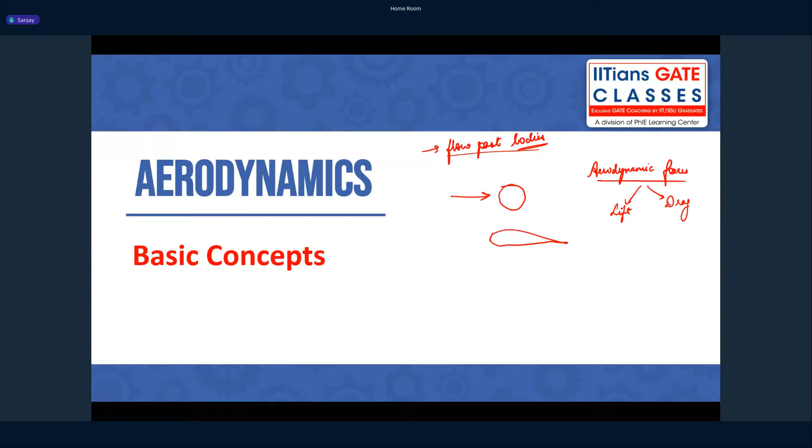We are going to get into multiple theories which will help you to mathematically understand how these forces are produced. We are going to link it to the application, and so this course is mostly going to be theoretical. Here and there we will see some applications of that. So that is, in very brief, about aerodynamics. Okay, so now let's get started.

To start with a very simple question: how is lift generated in an aircraft? So what do you see here in this image? This is an aircraft wing, right? It's a wing of a commercial aircraft. This wing is what helps you to generate lift, and that is the force which helps your aircraft to lift off in the air, right? So how do you think lift is generated by this wing?

Anyone? Please feel free to talk. The more the interaction, the more we are going to learn. So how is the lift generated?

Difference in pressure. When the flow moves around the body, the aerodynamic forces acting along the body are different. In this case, the upper part experiences less pressure, the lower part experiences more pressure because of the body shape, which basically affects the flow, and thus the lift is produced.

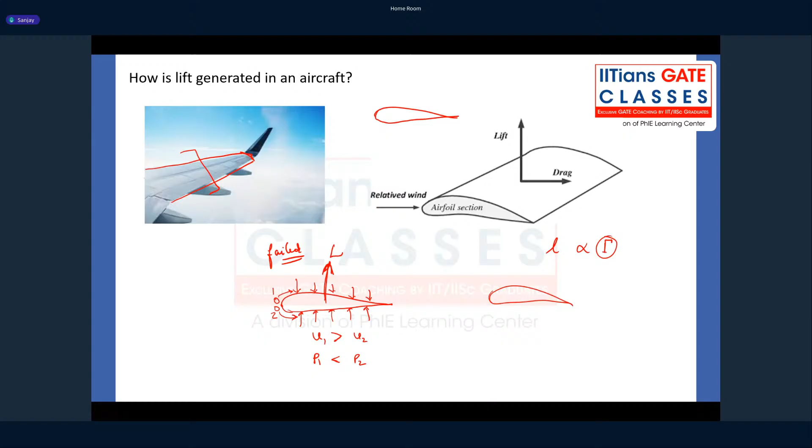This was proved. Does someone know what this theorem is known as, which relates lift and circulation? If anyone has already done aerodynamics. Okay, so this is known as the Kutta-Joukowski theorem. We will study this in our course later. We will actually derive this theorem, which says lift is directly proportional to the circulation.

The circulation itself is produced due to the airflow, due to the velocity distribution on the surface of the aerofoil, which in turn makes the pressure distribution. So ultimately we are saying the same thing, that it's due to the pressure distribution, but the way we explain is different. If you read about the early development of aerodynamics, people were actually struggling to explain lift generation. Even today, none of the theories can give a very satisfying and convincing explanation. There is some or the other flaw. So who knows? Maybe whatever we are learning today might become obsolete after a few years.

All right, so keeping aside those things, for us now we understand that there is this shape called an aerofoil. It is an aerodynamically designed, streamlined shape which produces aerodynamic forces, lift and drag. Is that clear to everyone till here? Are you all following?

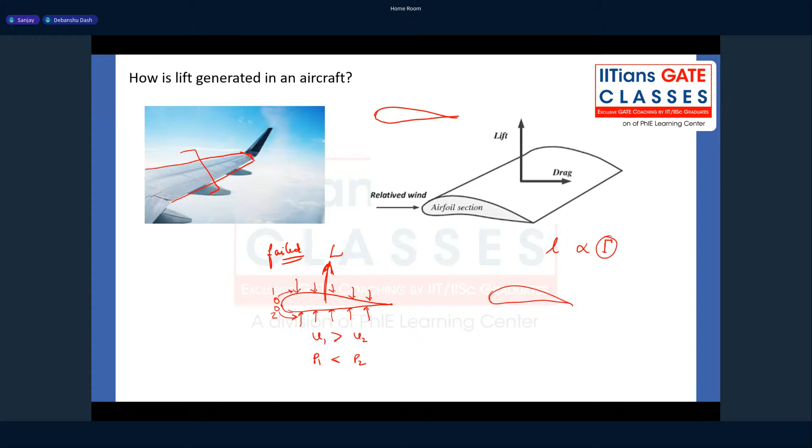So the image that I had shown you, what kind of wing was this? What kind of wing do you mostly observe in a passenger aircraft that you normally fly? It's a swept back wing, sir. It's a swept wing, okay. And is it a swept rectangular wing? Yes, sir. It is a tapered wing, right? You can see it tapers. Tapers meaning the cross section changes along the span. So the aerofoil sections keep changing. It is not the same at the root and the tip. So it's a tapered wing.

So generally, we see tapered wings in conventional aircraft. And there's a reason why we use tapered wings and not rectangular wings. All these types of wing have their own significance and relevance in the aircraft. So how do you choose a wing? When you do an aircraft design, there's a critical part known as wing design. How you choose a wing completely depends on the mission the aircraft is involved in.

If it is a fighter aircraft, the type of wing you would choose is different. If it is a conventional passenger aircraft, it is different. If it is a stealth aircraft, the wing chosen is different, because you have to minimize your radar signature to have stealth capability. The mission is very important, and if it is a multi-role aircraft, we design it for the worst case scenario. So all these types of wings have their own significance. For example, can someone tell me any aircraft that uses delta wings? Have you seen triangular shaped wings? Any aircraft?

Yes, Ali. Fighter jet. Fighter jets, very good. Tejas LCA, yes. Tejas uses delta wings. What kind of wing does B2 bomber use? Have you seen B2 bomber? Yes, this kind of delta wings. Yes, that's also kind of a delta wing.

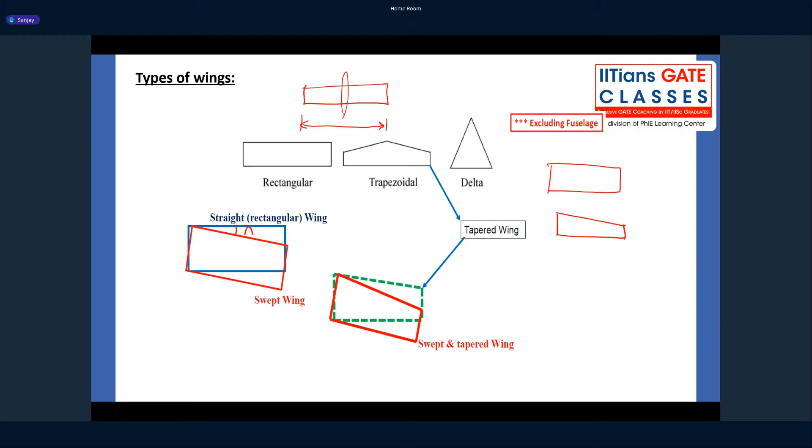Yes, Eurofighter, Rafale, so all these fighter aircrafts, they use peculiar type of wings. Okay, so these are in general the types of wings. So now we'll just quickly see some nomenclature about the wings, some terminology which is used to understand the wings. Okay, so you can see here this is kind of a tapered wing. Let's say if your aircraft is something like this, is your aircraft body.

So the part of the wing which is attached to the aircraft, or which is buried inside the aircraft body, is known as root. Okay, this is known as root, and the free end of the wing is known as tip. Okay, this is known as wing tip. This is known as wing root.

Okay, now as this is a tapered wing, you can see the size of the aerofoil used at the root is different from the size of the aerofoil used at the tip, right? So basically, when I say the size, it's the length of the aerofoil. We call it as chord length. So the chord length is varying along the span. So the length of the chord at the root is known as root chord. We denote it by CR. At the tip, we denote it by CT, tip chord. And at any other location along the span, it is function of the span basically.

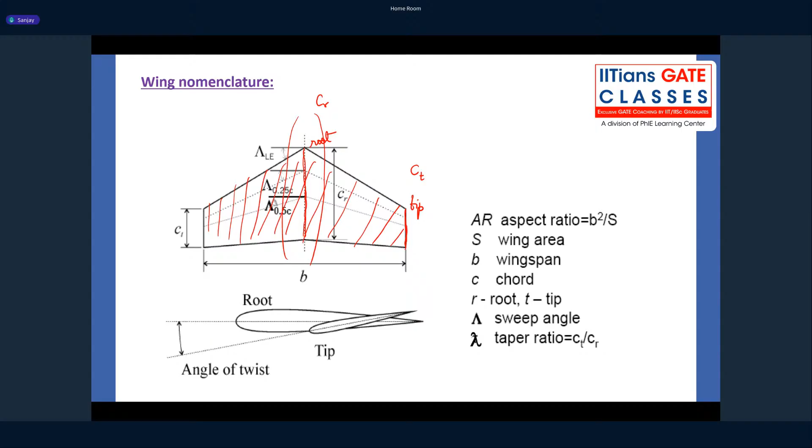All right. So this wing you can see has certain surface area. So the surface area of the wing, which we call the projected area, or planform area, we denote that by capital S. What is that? It is a planform area. Just one second. So the planform area is the projected area of the wing. So what do you mean by projected area? If I project the wings on a plane or a paper, the area that I get is the projected area. So the area of that shape is the planform area.

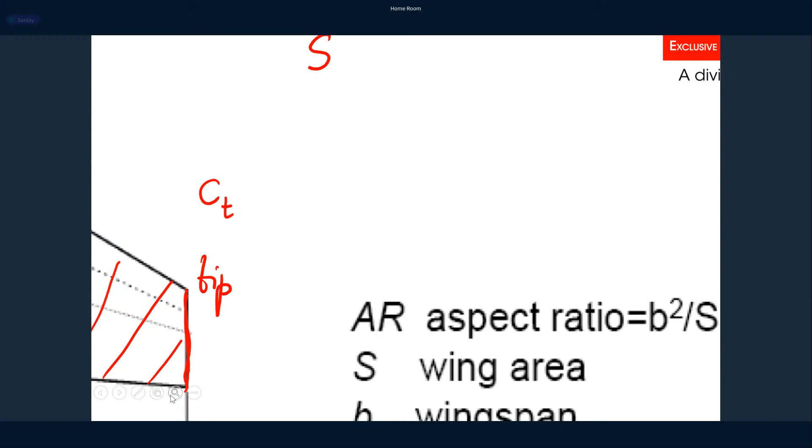Is the planform area which we denote S. Okay, capital S. So generally, planform area is the area of the complete wing. It is not just one half or the other half of the wing. It's for the complete wing. Now in some kind of aircrafts, it depends on the manufacturer. If it is a Boeing wing, in some aircraft, you see that the wing is usually buried inside the aircraft body. In some aircrafts, the wing is not buried; it is just attached. There's a wing fuselage attachment, and the wing starts from the fuselage and it goes to the tip. So in any case, the complete area of the wing is taken as the planform area.

Okay, so we call S as the planform area, and then there's a span. The length of the wing, right from the left end to the right end, is known as wingspan. We denote it by small b, which is the wingspan. So the semi-span becomes b by 2. Okay, C is the chord. Chord is the length of the aerofoil from the leading edge to the trailing edge of the aerofoil. I explained you the root chord and the tip chord.

Now the ratio between the tip chord and the root chord, we call it as taper ratio. So this taper ratio tells you how is the wing tapered, or what is the extent to which you have tapered the wing. So what do you expect, the taper ratio is going to be greater than 1 or less than 1?

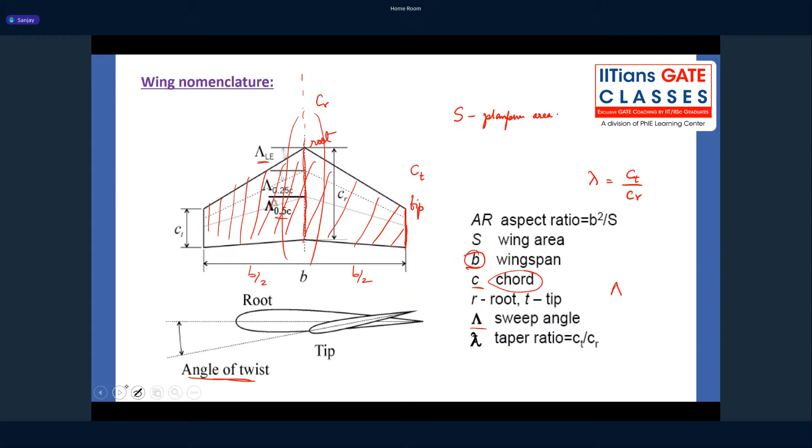So again, there's going to be one major problem in the course, the convention. So I'm going to follow John D. Anderson. Whatever conventions Anderson has used, it's a very standard book, we call it a Bible for aerodynamics, we will be using that. We will not confuse. If you refer to multiple books, the conventions might vary. So we'll stick to one particular convention. All right, I'll just proceed.

Now let's see an aerofoil. So an aerofoil is the cross section of the wing. As I told you, if you cut the wing and you look at it from the side view, you see a cross section which is of this shape. So you can see this aerofoil is a streamlined shape, right?

So the foremost point of the aerofoil is known as the leading edge, or we call it the nose of the aerofoil. It is a blunt nose. It has a blunt leading edge. It is not very sharp. It is not that it is a corner. We cannot make it a corner. The reason you will understand later.

It is so, we make it blunt for some aerodynamic advantages. Okay, so you see that the leading edge is blunt. Rather, if you go very close to the leading edge of the aerofoil, you will observe that this is kind of a circle. You will get an arc, which could be an arc of the circle. So the radius of the circle is known as leading edge radius. Okay, it's known as leading edge radius.

And then you take a tangent from the circle and then you extend, you get the aerofoil. Okay, so there's an upper surface, there's a lower surface, and there's a trailing edge. Trailing edge is the aftmost point of the airfoil. Okay, and there's a line which extends from the leading edge to the trailing edge, known as chord line. We call it chord line, which goes from leading edge to trailing edge.

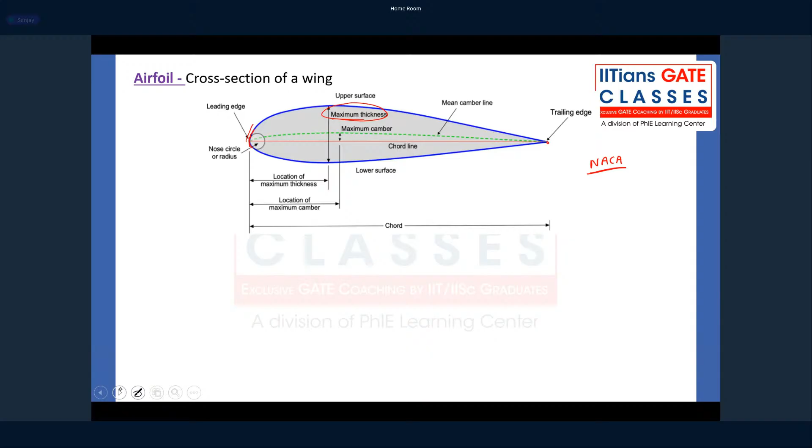So I've written the same thing over here and not repeat. So you can see that you have a symmetric aerofoil. A symmetric aerofoil is where the upper surface and the lower surface have very similar curvature. The curvature is not different. Or you can say that if you look at the upper surface and the lower surface, the coordinates are at equal distance from the chord line. So it is a symmetric curvature with respect to the chord line, so we call it a symmetric aerofoil.

Symmetric aerofoil is the simplest type of aerofoil, which has zero camber, so it is easier to analyze mathematically. But do we generally use symmetric aerofoil in a wing? No, right? We don't use it because it does not generate any lift at zero angle of attack. So we always use cambered aerofoils to get the advantage of lift.

When we say cambered aerofoil, you could have positive camber and negative camber. A positively cambered aerofoil has the camber line above the chord line. This camber line is nothing but the average of the upper surface coordinate and the lower surface coordinate. If you take the average, you get the mean camber line. If the camber line lies above the chord line, we call it a positively cambered aerofoil, otherwise it's a negatively cambered aerofoil.

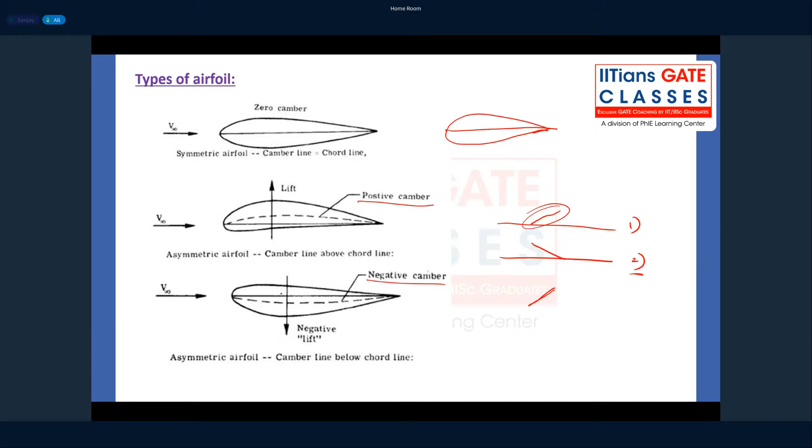So you cannot use a negatively cambered aerofoil, because if you use that, will you be able to cruise? During cruise, your angle of attack is a positive angle of attack, right? You will not be able to cruise. So now let's define angle of attack. Angle of attack is the angle between the relative wind and the chord of the aerofoil. So chord line and the relative wind, that is the angle of attack.

A lot of people have a misconception about angle of attack. They think it is the angle at which the aircraft is oriented. No. There are different angles: one is a pitch angle, one is a flight path angle, and there is angle of attack. All three have different meanings. Angle of attack is defined as the angle between the wind or the free stream velocity and the chord line. So always be careful about the definition. So you can have two cases.

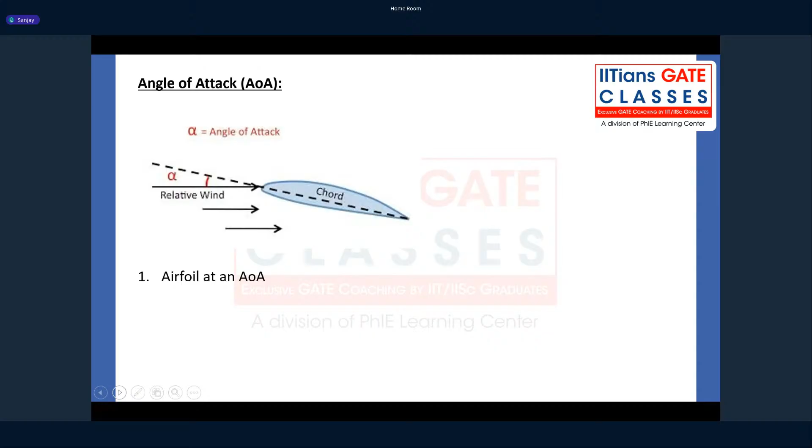One case is that your free stream velocity is approaching in the horizontal direction and your aerofoil is inclined. So there is an angle of attack generated by the aerofoil. This is your alpha. We call this configuration aerofoil at an angle of attack. And there could be a second possibility where the free stream is at an angle of attack, which means your aerofoil is straight, but the air hitting the aerofoil is coming at an angle of attack.

It could be something like this. This is the chord line, and this is the free stream velocity. So again, there's an angle which is the same angle alpha. So there can be two possibilities. Can someone tell me, do both of these possibilities mean the same to the aerofoil? Okay, Yaneshwar, yes, this was asked in the paper. Same. Both are same, right? Yes.

You would have heard that whether a body moves in the fluid or the body is kept stationary and the fluid moves over it, the effect is the same, because ultimately the movement of fluid particles generates these forces. So whether you keep your aerofoil at an angle of attack or keep it straight and let the free stream pass at an angle of attack, the performance of the aerofoil remains the same. That does not change. Is that clear?

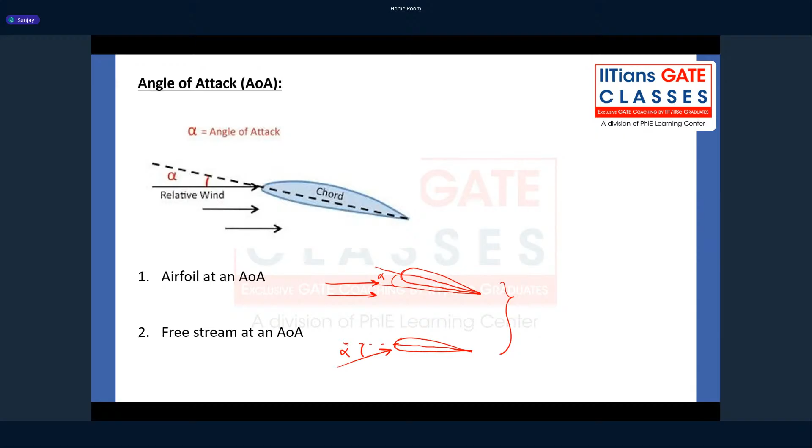Okay, so I guess we are overshooting time. So yeah, I think I will just stop it here. I had many more things to tell you, but for the interest of time, we'll just stop here. We'll just take up one question, okay, and we can end it.

Okay, so just look at this question. It was asked in GATE 2015. Consider a monoplane wing and a biplane wing with identical airfoil sections, wing spans, and incidence angle. Incidence angle is the angle of attack. Okay, in identical conditions in a wind tunnel. So forget about all that.

So what this question tells you is you have a monoplane wing. What do you mean by monoplane wing? It is your conventional aircraft wing. Okay, you have an aircraft and you have the wing. This is known as monoplane wing. So it is one single wing. What is a biplane? Biplane means you have two wings, okay, which are connected through struts.

Have you seen a biplane? Do you know the first ever aircraft that was developed by Wright brothers was a biplane? Okay, it looked like this. So there are two wings, and this was the aircraft body, and they were connected through struts. Okay, it was a biplane.

So you take a monoplane and a biplane, assume the free stream conditions, the orientation, and everything else is the same. How can you compare the lift and the drag? So as compared to monoplane, the biplane will experience a higher lift, higher drag, lower drag. What is the case? Yeah, it is going to have higher lift and higher drag.